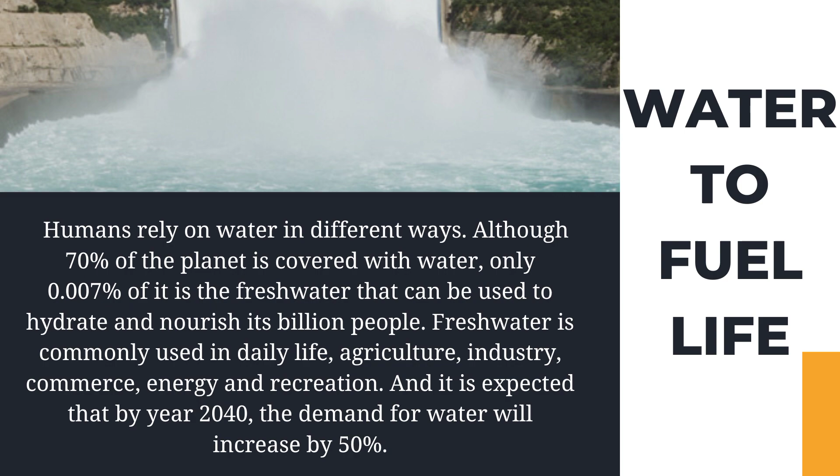Only 0.007% of it is fresh water that can be used to hydrate and nourish billions of people. Fresh water is commonly used in daily life, agriculture, industry, commerce, energy, and recreation. It is expected that by year 2040, the demand for water will increase by 50%.

Water scarcity: the world is already facing water scarcity. It is also a major problem in the Philippines, where a report by the World Health Organization revealed that 1 in 10 Filipinos still do not have access to improved water resources.

The ability of urban communities to obtain enough clean and safe water for daily usage is becoming more and more challenging as a result of these changes.

Engineering solution to the water crisis. An article published by Born to Engineer stated that one engineering solution to aid the water crisis is through wastewater treatment plants.

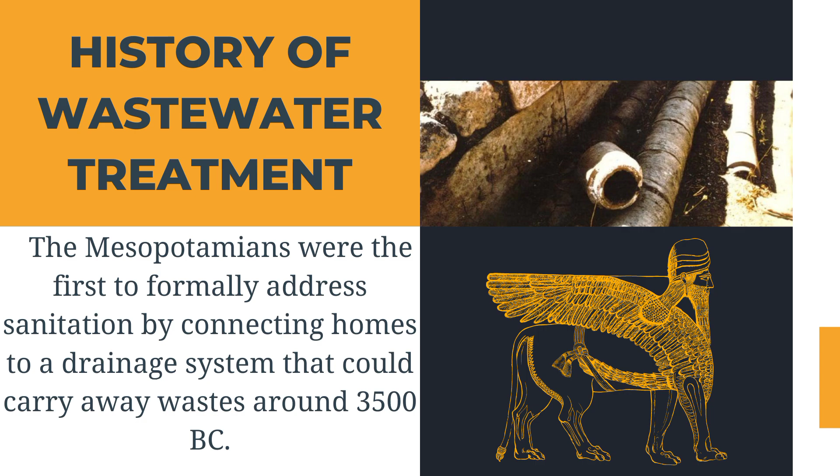History of wastewater treatment. The Mesopotamians were the first to formally address sanitation by connecting homes to a drainage system that could carry away waste, around 3500 BC. Then the Romans perfected their sewer system.

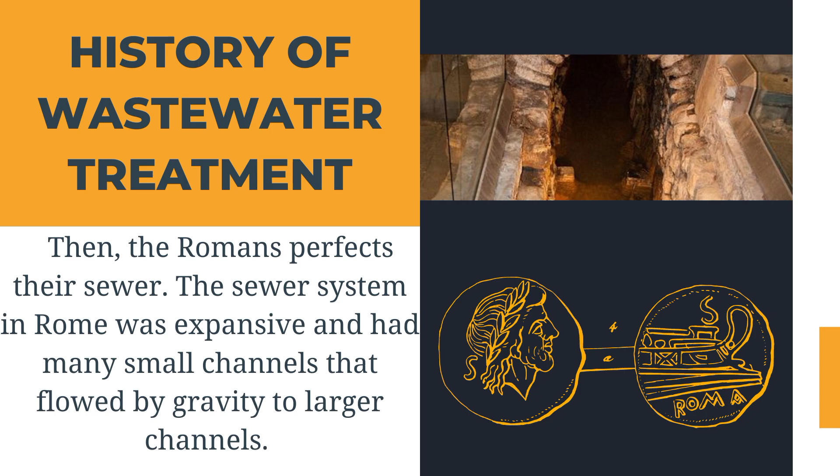The sewer system in Rome was expansive and had many small channels that flowed by gravity into larger channels. The 1900s witnessed a revolution in wastewater management as scientific understanding and societal priorities started to decrease unhindered pollution.

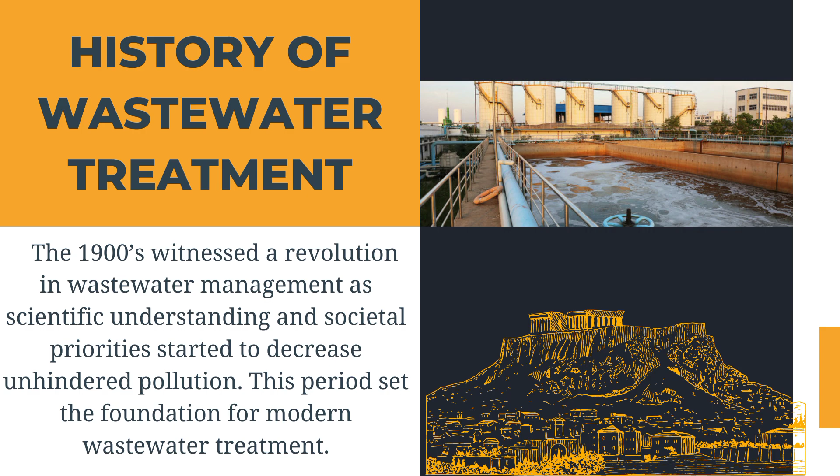This period set the foundation for modern wastewater treatment. Wastewater: water that has been contaminated by domestic, industrial, or commercial use is referred to as wastewater.

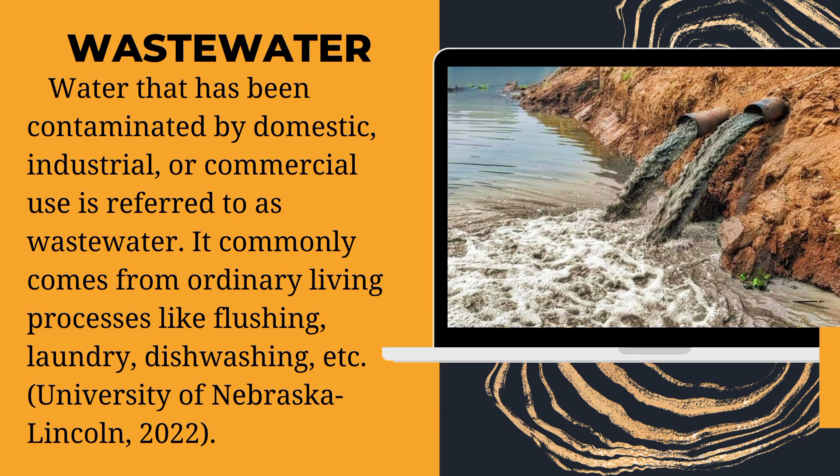It commonly comes from ordinary living processes like flushing, laundry, dishwashing, and others. The composition of wastewater is 99.9% water, with the remaining 0.1% being other materials.

Organic matter, microorganisms, and inorganic compounds make up this 0.1%. Other pollutants found in it are bacteria, viruses, and disease-causing pathogens.

Wastewater treatment plant in civil engineering. The design of the water treatment plant and city sewage system is a more common civil engineering work related to wastewater.

Civil engineers in this job can perform a variety of tasks, including directing the licensing and permit applications of wastewater treatment plants. Civil engineers also work with state agencies to ensure that the wastewater treatment plant complies with legal requirements.

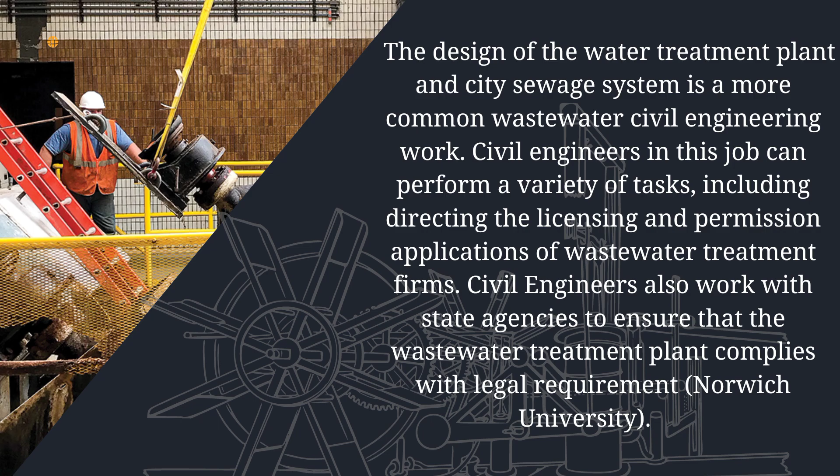Wastewater treatment plants in subdisciplines of civil engineering. In water resource engineering, according to Riverside, wastewater treatment plants are part of water resource engineering since the quantity and quality of wastewater from municipal areas usually exceeds the assimilative capacity of receiving natural waters.

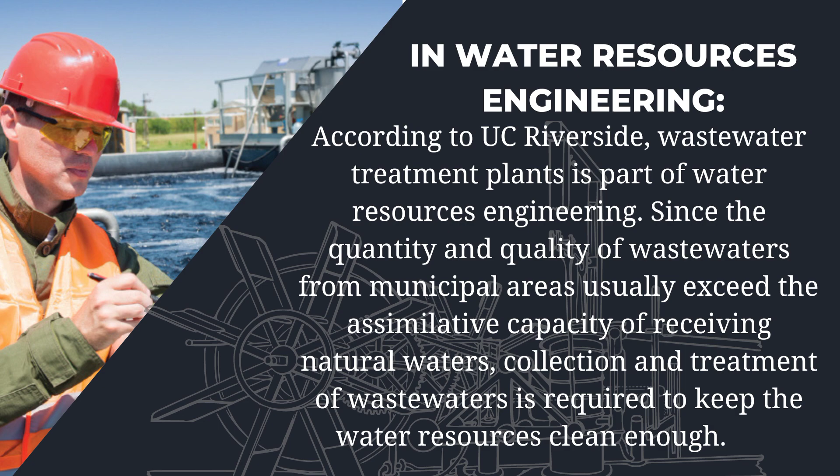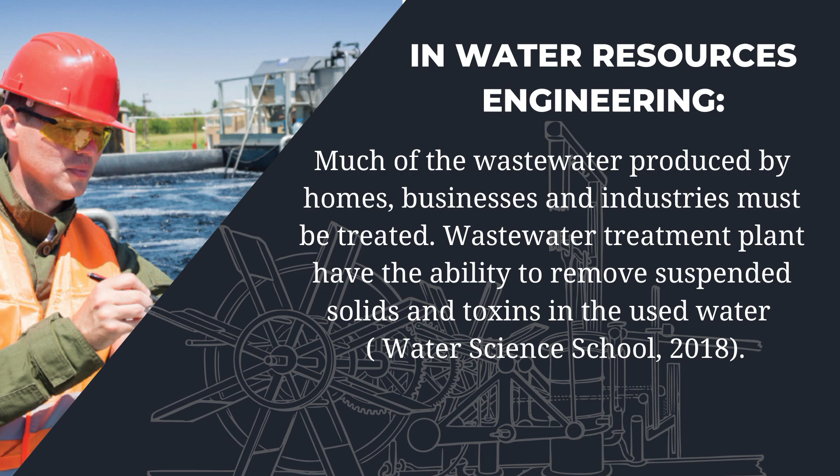Collection and treatment of wastewater is required to keep water resources clean enough. Much of the wastewater produced by homes, businesses, and industries must be treated. Wastewater treatment plants have the ability to remove suspended solids and toxins from used water.

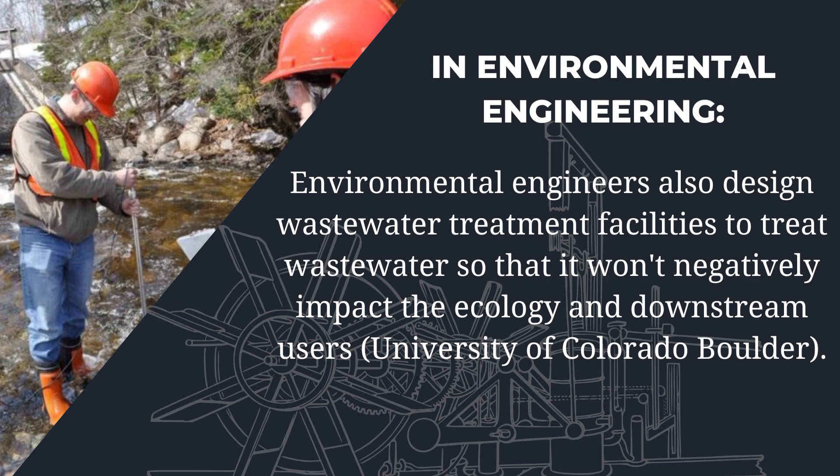In environmental engineering, environmental engineers also design wastewater treatment facilities to treat water so that it won't negatively impact the ecology and downstream users. Wastewater treatment plants in other types of engineering.

Just like in civil engineering, wastewater treatment plants are also part of sanitary engineering. Sanitary engineering is also known as wastewater engineering, where they involve the use of mechanical, biological, and chemical operations.

This is done to achieve and maintain excellent water quality on a daily basis. It primarily deals with the transportation, treatment, and management of contaminated water.

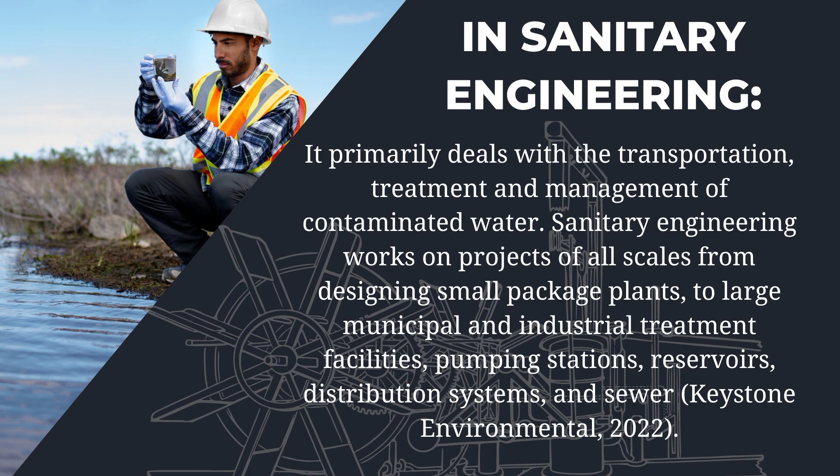Sanitary engineering works on projects of all scale, from designing small package plants to large municipal and industrial treatment facilities, pumping stations, reservoirs, distribution systems, and sewers.

But how can wastewater treatment plants help in solving the water crisis? Research question: the aim of the research is to find out how wastewater treatment plants can help in solving the water crisis.

And the relationship between the amount of treated wastewater produced by wastewater treatment plants and reducing the water crisis. Specifically, the researchers try to answer the following research questions.

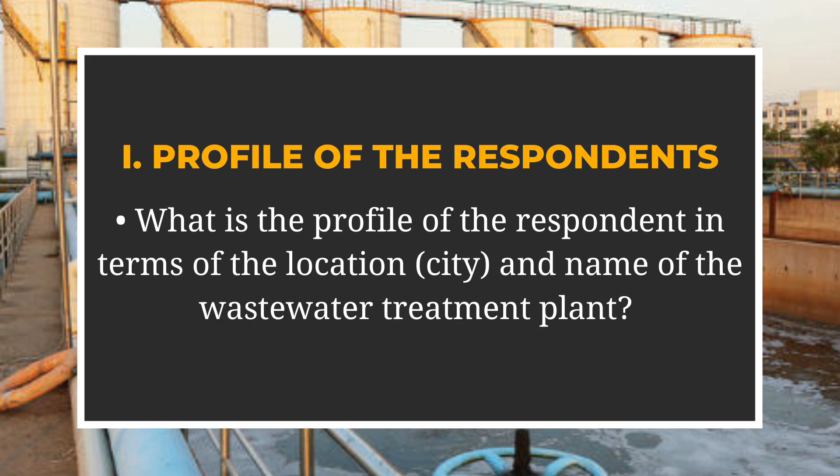1. Profile of the respondent. What is the profile of the respondent in terms of the location and name of the wastewater treatment plant?

2. Role of wastewater treatment plants in solving the water crisis. How can wastewater treatment plants help in solving the water crisis? What are the different processes involved in treating wastewater?

3. Relationship between the amount of treated wastewater produced by the wastewater treatment plant and reducing the water crisis. What is the amount of treated wastewater produced by the wastewater treatment plant monthly? What is the monthly treated wastewater's equivalent contribution in reducing the city's water crisis?

Significance of the study. There were limited studies regarding the possible role of wastewater treatment plants in aiding the water crisis. That's why, if the research proved that wastewater treatment plants could really help in solving the water crisis, it would benefit society and future researchers.

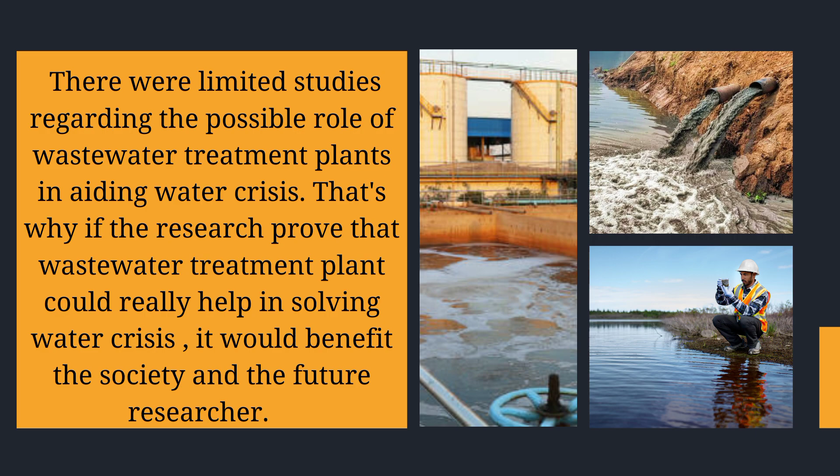It would benefit the society and future researchers. The community would be aware that wastewater treatment plants can also be used in combating the water crisis. Thus, they would use it and improve their existing plants.

It will also benefit future researchers, as the research will serve as a guide to other researchers who would like to pursue the same study for the study's further development.

Research design: the study employs a mixed method. In mixed methods, the team of researchers combines aspects of qualitative and quantitative research approaches in collecting and analyzing data to understand the research problem more completely.

Since it is a mixed method, the research utilizes two research designs. Descriptive research design is employed for the qualitative approach, while under the quantitative approach, correlational research design is utilized.

Research instrument: interviews and structured questionnaires were used as the research instruments. Interviews helped the researchers gather qualitative data, while structured questionnaires were responsible for collecting quantitative data. There are 5 questions related to wastewater treatment plants and the water crisis.

Data gathering procedure: data gathering was done in person. It was conducted at the sewage treatment plants of 5 cities in the Batangas region, which are Lipa City, Calaca, Batangas City, Santo Tomas, and Tanauan.

The researchers asked permission to carry out the study. When the request was granted, the researchers visited the treatment plants and asked every treatment plant manager to be a representative of their city's treatment plant.

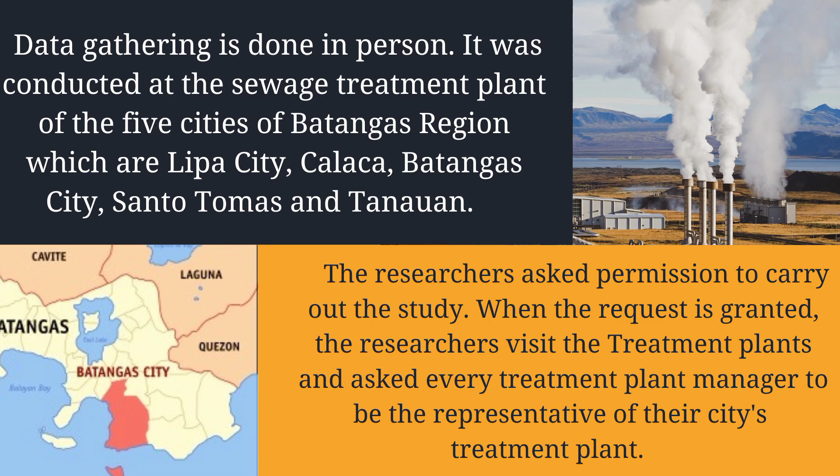In conducting the structured questionnaires, the respondents were given a printed set of questions. While conducting the interview, the researchers recorded the answers of the respondents through audio and video recorder.

Data analysis: two data analysis methods are used, one for the collected qualitative data and one for the collected quantitative data. For the qualitative data, content analysis is employed.

For the quantitative data, researchers use inferential statistics. Under it, hypothesis testing is utilized. The purpose of hypothesis testing is to evaluate relationships between variables.

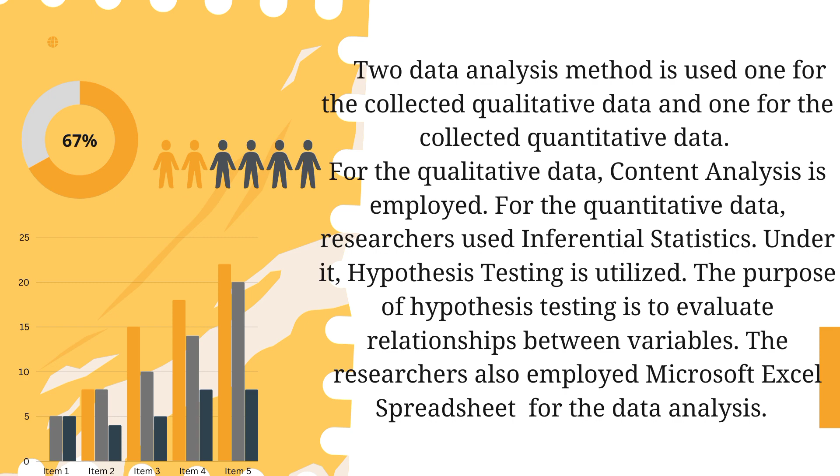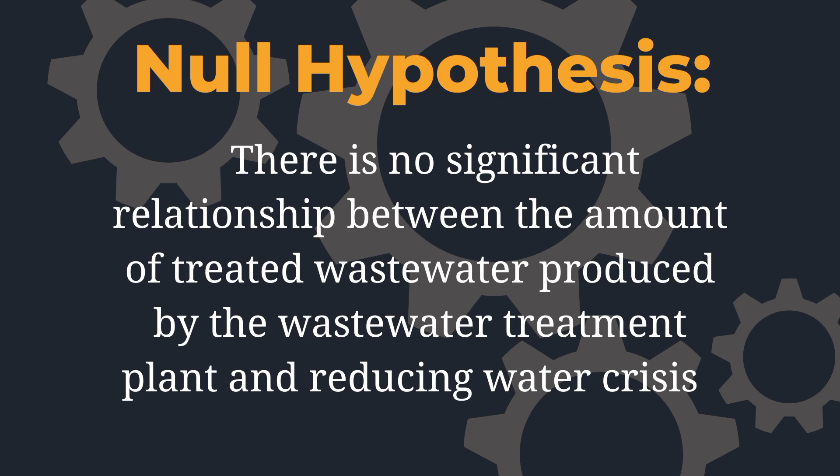Researchers also employed Microsoft Excel spreadsheet for the data analysis. Hypothesis: null hypothesis - there is no significant relationship between the amount of treated wastewater produced by the wastewater treatment plant and reducing the water crisis. Alternative hypothesis:

There is a significant relationship between the amount of treated wastewater produced by the wastewater treatment plant and reducing the water crisis.